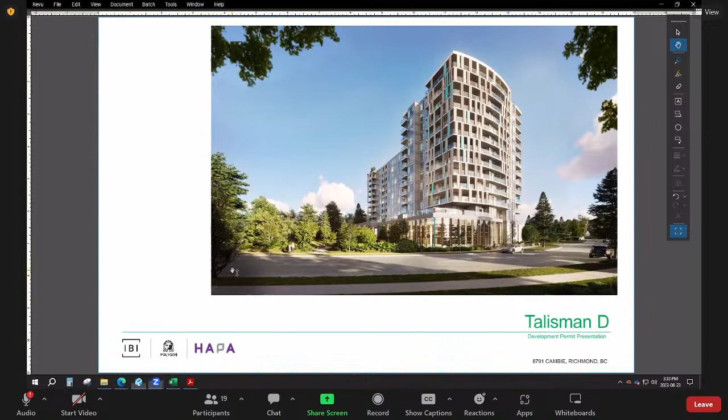Okay, thanks for hearing me today. Here to present Talisman, or Talisman D, the central site in this mixed-use community being planned for this location. Talisman A is to the south, the wood frame product, and there are future phases to the north as well, with a new road system being built around this site. So the site in question contains a singular building with a large amount of open space to the north, and surrounding streets on two sides, as well as a pedestrian route on the south.

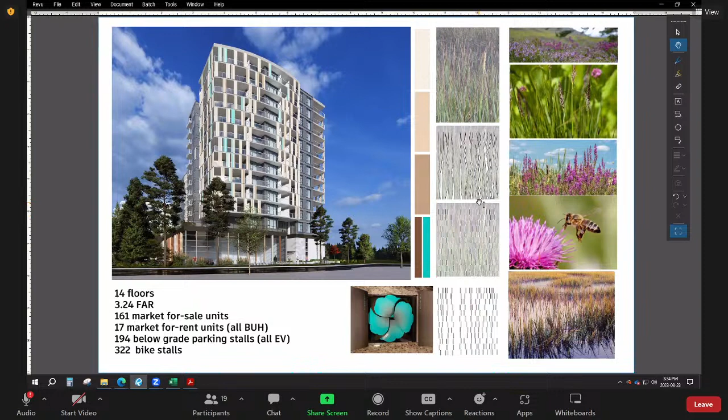Overall, as was mentioned, it's 14 stories, 161 market for sale units and 17 market for rent units, all BUH, with 194 below grade parking stalls, all EV, and 322 bike stalls. The genesis for the look of the building was inspiration taken from the grasslands and farmlands around the area, the meadows, and where the river meets the land.

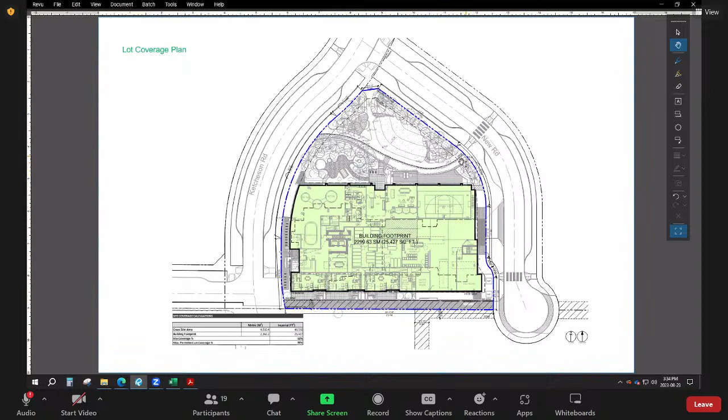The site context is basically an open field today for the most part, as well as the church property just to the south of us. The site is basically forming a box of program, with the remainder being open space, half of which is public park and half of which is private amenities.

The main pulse of height is on the west side, and on the east it's a little bit lower at 13 stories. As was mentioned, there's below grade parking for 2 levels, as well as a partial portion of bicycle parking as you first come down the ramp. On grade, the parking access comes from the new road, entering in and going into the basement with a direct path of travel. The loading functions and waste are all down on this bottom portion.

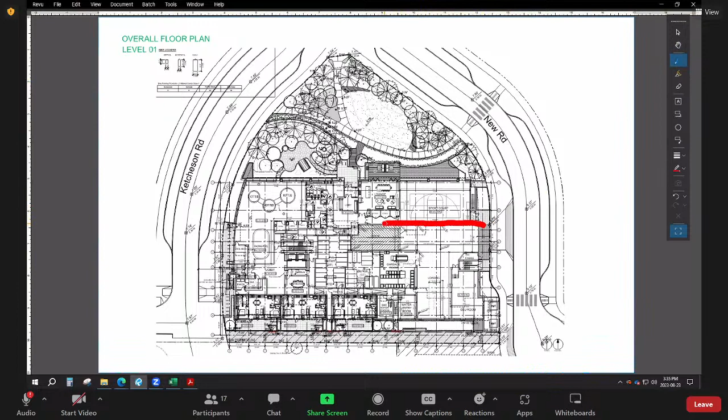The portion to the north includes a sports court and a lounge; the entrance for this large amenity zone is accessed by both the residents of the building as well as some of the surrounding buildings, which will be using this clubhouse as well. The clubhouse is on 2 levels: a ground floor, plus a floor above that has further programmed space.

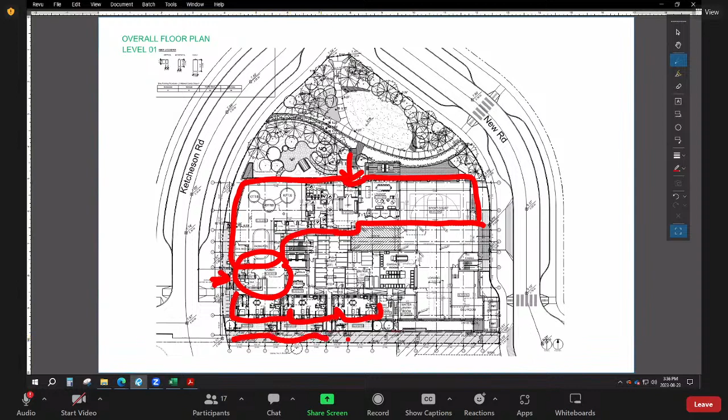The main lobby is off Ketcheson, and there are ground-oriented units facing the pedestrian space. There's also some bike storage for larger bikes on grade and smaller bikes upstairs. An open-to-below space in the corner gives you a double-height space for the swimming pool.

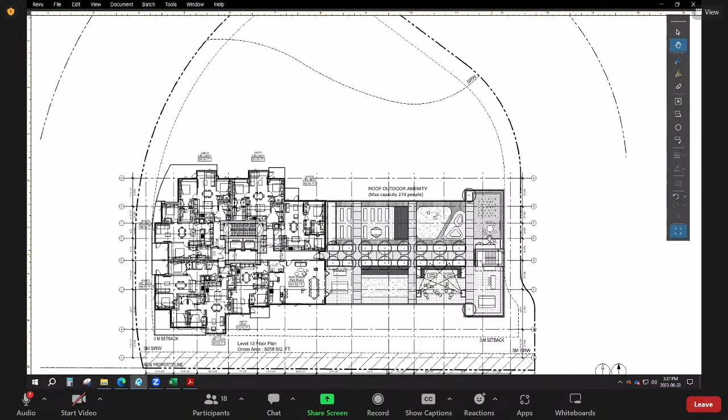As was mentioned, there's a full level of rental suites, which are also BUH units on the 4th floor. Typical units above carry on up till you get to the last floor, which has a large outdoor space for the building, for outdoor amenity, as well as an indoor amenity adjacent to that. One more floor of units followed by the rooftop.

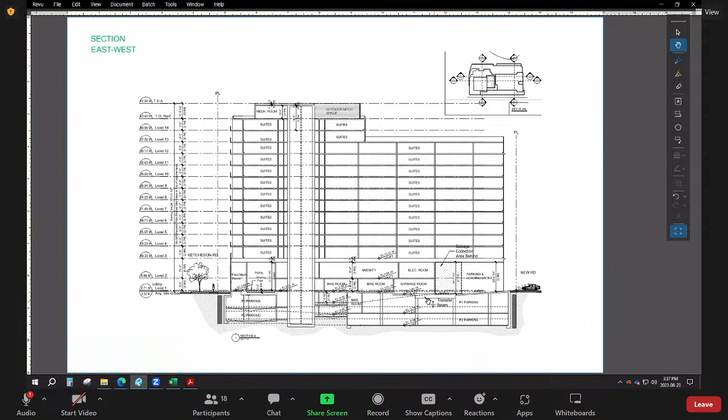Overall, the building hits the max heights permitted in the area, as well as the correct proper heights for any habitable spaces at grade based on the road elevations. As mentioned, the podium is a double-height pool, plus 2 stories of amenity and townhouse ground-oriented units, with regular units all the way up the rest of the building.

The screens present on the building give it an artful expression, which is important because this neighborhood needs to have artistic expression as part of the art neighborhood. It also recollects the grasses again in coloration and in the movement we're proposing along the balconies.

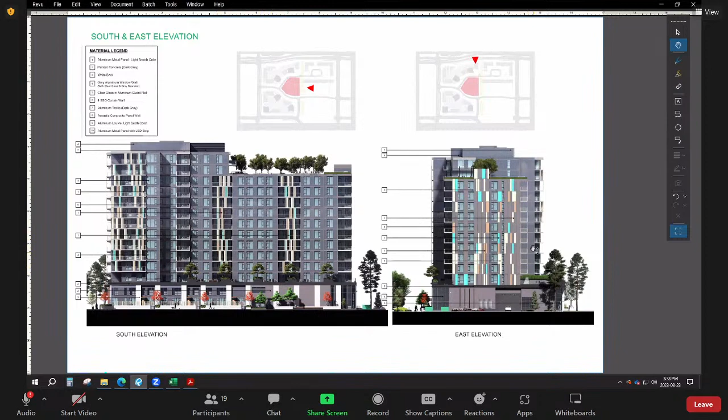That expression happens on the north, south, and west sides, as well as the east elevation, which has it on the window wall itself in colored panels.

The proposal includes a lighting scenario that'll have soft lighting on some of the vertical members in the feature corner only, to make it beautiful both during the day and at night.

Again, the landscape, which we'll get into, is very lush, looking at bringing in conifers and other plants that'll make it quite a lush, green experience at grade.

This is showing the south side with ground-oriented units and a decorative fence being used as a privacy screen or a rail between the units and the walking path, at guardrail height.

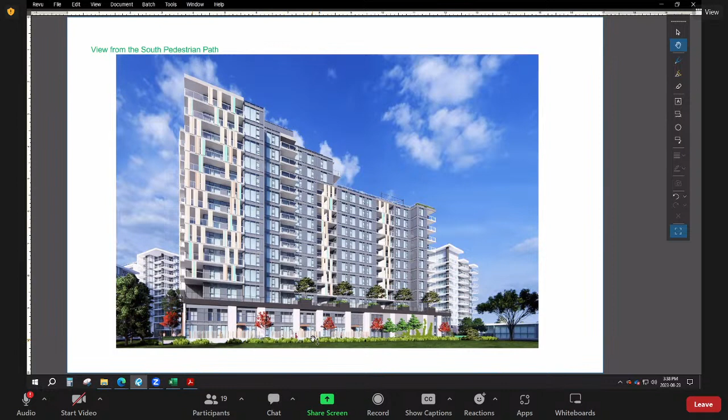There are opportunities for some planting and benching, as well as at the far corner, where we're showing a glazed box to express the DEU facility on the inside, so you can see some of the engineering.

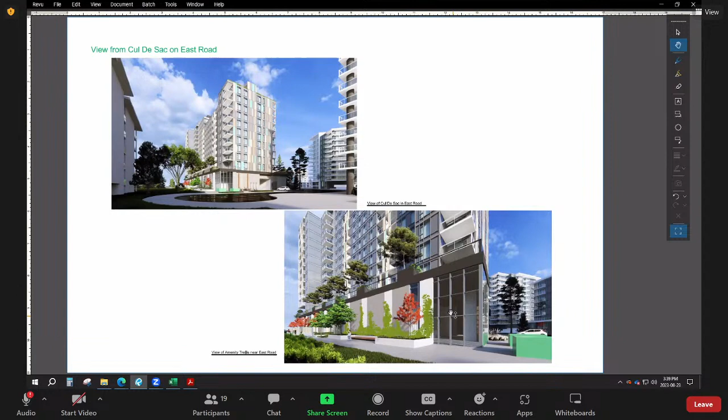The lobby, as well as the artful rail in the back, seen in these two images here, and then the night view.

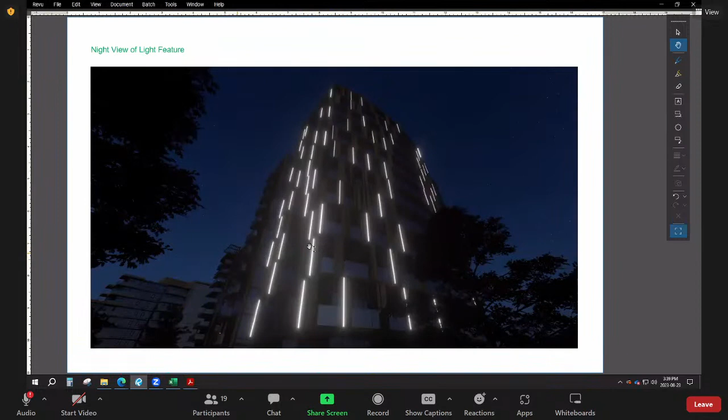I'll pass it on to landscape to speak to. Stephen, would you like to speak to the slides? You can tell me when, and I'll go to the next slides.

Sounds good, thanks Gwen. We always start off our landscape by giving a landscape rationale as to what inspired the design of the site.

One of the things here is we found a historic map of sloughs that used to run through the city of Richmond, and one of them actually intersects our site. We wanted to celebrate that a little bit and use it as a divider between the public and private realm, in the form of a rain garden.

Another principle is reinforcing the edge by using topography and planting, providing a bit of separation between the site and the street around it.

Acknowledging that this site is pretty central to the rest of the development, we wanted to make sure we address all the connection points and that it's accessible for everyone.

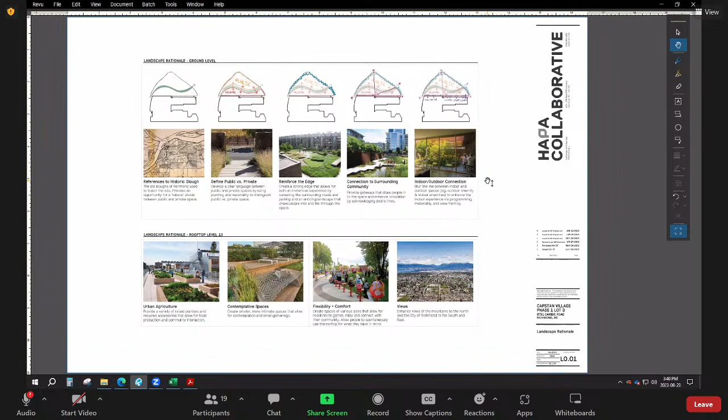We always take a look at the indoor and outdoor connection, and we've got strong glazing windows that face this private and public amenity space, making sure the outdoor spaces match what's being used in the indoor spaces.

Here you can see the ground level landscape. In the most northern area is the SRW. Along that edge, which Gwen is highlighting, that's the divider between the public and private amenity space, and we're using this rain garden as that strong divide.

Lush planting along the edges, a bit of topography, several large benches that could be used for informal seating or staging, and an open lawn area.

Crossing over the wooden bridge into the private amenity, we've got an outdoor spa area with hot tub, cold plunge, barrel sauna, and a fire pit. We've also got a barbecue area that connects to the indoor dining experience, as well as a bocce court.

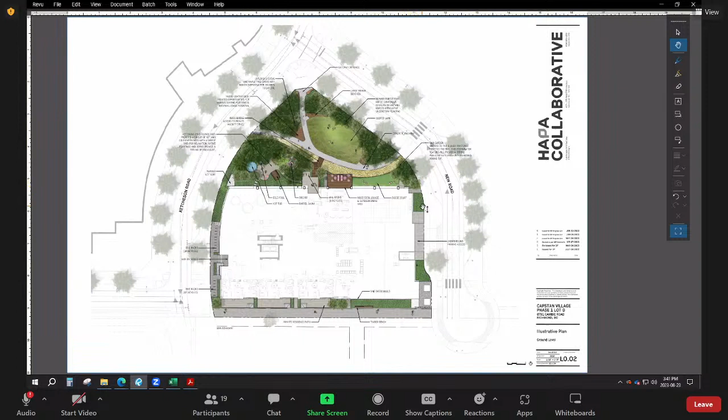It should be noted that this ground floor is accessible for all residents of the development, not just this building.

And then we've got the rooftop here. We've been inspired by the bento box idea, a very grid-like form. You walk out to this large corridor flanked by flowering apple trees that are fragrant and colorful, and on either side we've developed a series of rooms.

So we've got urban agriculture, children's play, outdoor dining, and relaxation areas.

And just a few sections showing, back on the ground level here, the berming that we talked about and some of those raised bench seating, and then the lawn area that would gently slope back down to the concrete walkway.

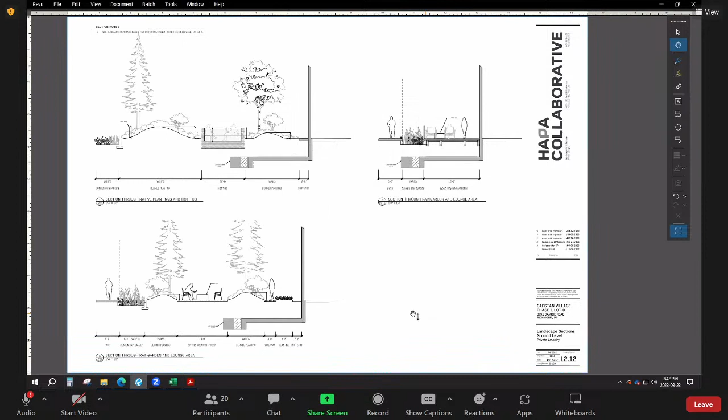A few more sections. This is now in the private amenity, showing berming, lush native plantings, and the rain garden. Back here is the SRW, pretty standard. We've got our ornamental fencing there and some gated access.

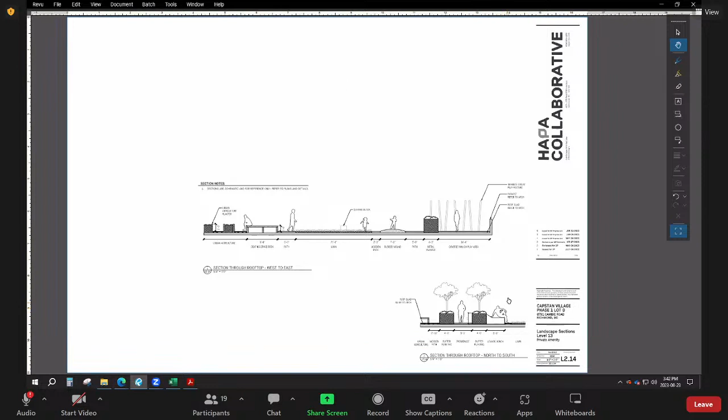And the rooftop here showing some of that children's play, urban ag, and a section through that corridor of flowering apple trees, and some of our children's play features, which we've tried to keep more informal but fun for all the kids to play around on. I think that's the end of the presentation.

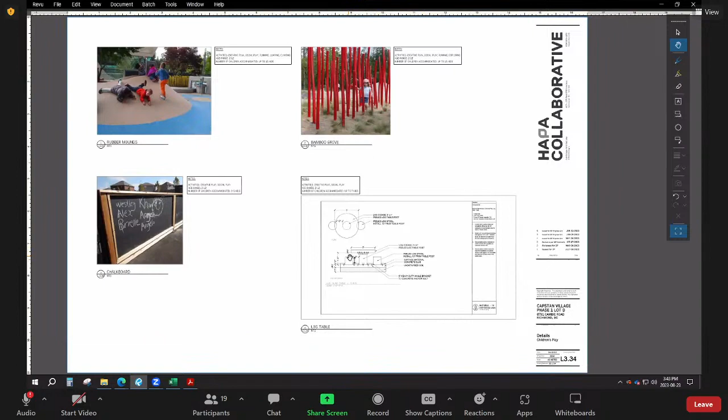Okay, great. Thank you. Let's see if John or Cecilia have any questions. Just a quick one on the amenity space — so level 13 is for private use only, and the rest is all shared with the other phases, correct? Correct.

Okay, and one question on the CPTED side of things — I imagine that lighting at grade will be present but not too glaring. Can you just quickly walk through that? Yeah, that's correct. The plan is to have lighting all throughout these walkways to make sure it's a well-lit space, but we've ensured all the lighting faces downwards for bird habitat and whatnot.

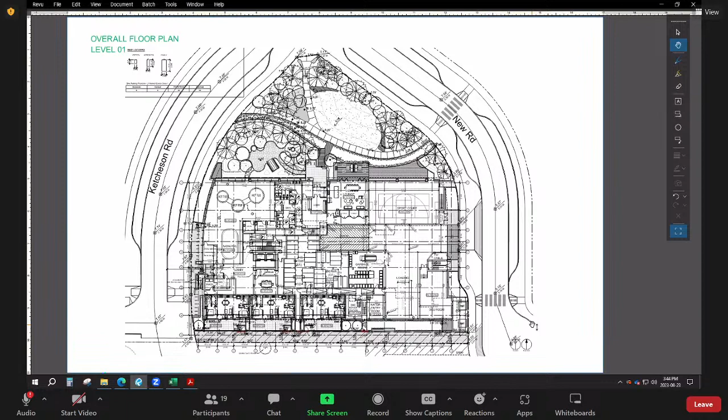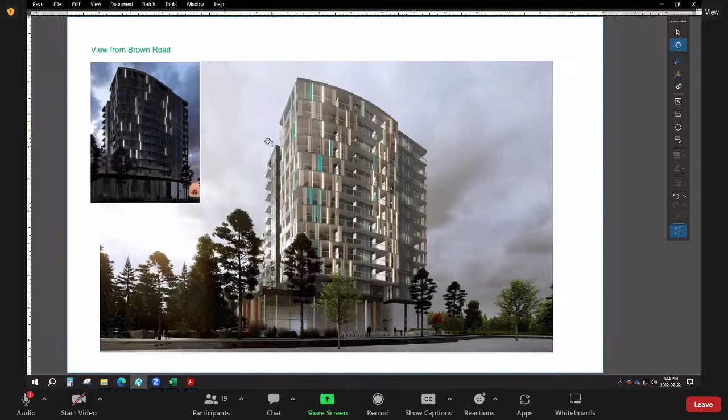While you're on the lighting question, can you speak to the building itself and the lighting you're proposing? Maybe Robin, do you want to speak to the lighting when it comes to time of day? Did you mention in your presentation that it's just a portion of the building? Correct, it's only on the west and partially on the north — just the portion you see in this picture, this leading corner.

So those light fixtures are located between panels within a screen. They'll have a C channel on the back side so there's no light shining directly back inside the home itself. We've been working with staff and our electrical engineer to make sure lighting levels won't disturb other residents of adjacent buildings. We're limiting the power output, controlling the time of day and intensity, and we have the ability to dim the fixture to 50% if necessary.

One of the development permit considerations is entering into an agreement and bonding for these light fixtures to ensure the city is satisfied that when operating, it is within parameters everyone can be happy with. So you have the ability to adjust it up and down, and if there are any unintended consequences, allow for that. That's right. Okay, great.

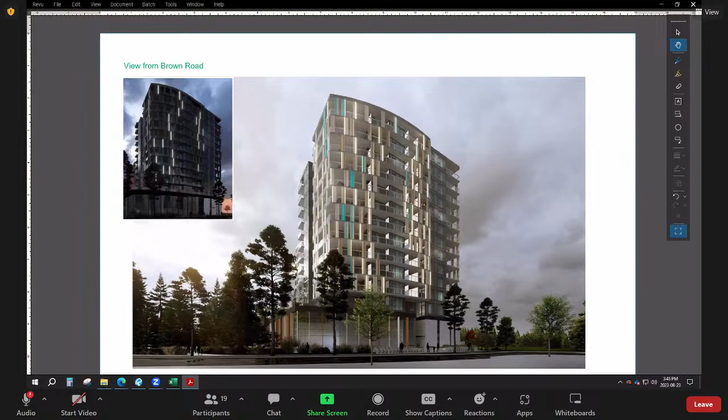John, did you have questions? Thanks, Mr. Chair, just one — if you could maybe speak to the adjacency to the south, I think that's the church site there, what's happening there? Sure, I can speak to that. We've been working closely with the Anglican Church, with the congregation there. We've got a good relationship with them. They have already entered into an underpinning and crane swing agreement with us for construction of this parcel.

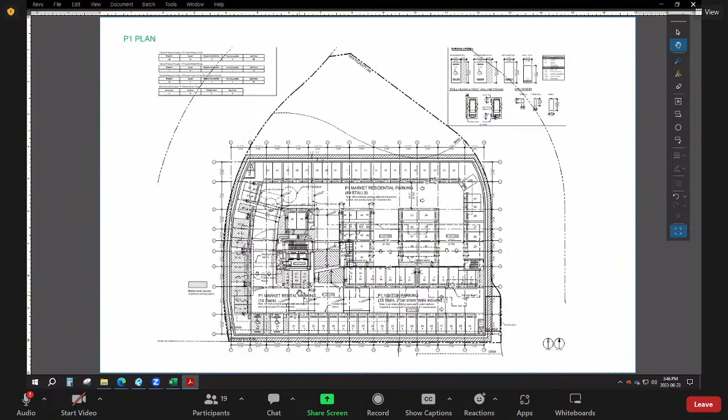Near the end of the slide deck there was one section through the site showing about a 3 or 4 foot step down to their parcel, so they're lower than our site, right there at the bottom. We're working with them to resolve that interface. We've discussed putting planting beds there for the daycare operated from the rear of their site, and talked about chalkboards, painting walls, things of that nature. We don't have a solution yet, but we're having the conversation about what that interface will look like, and we're happy to work with them to resolve it.

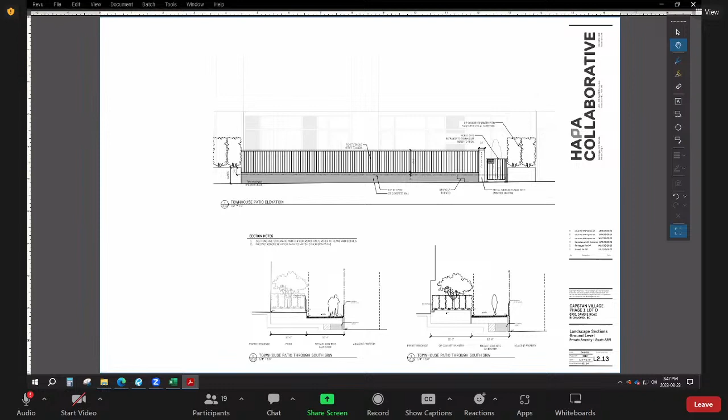Great, thanks. Okay, I had a question relating to the terrace level — there's some urban agriculture up there. My recollection, maybe this is for Robin or Wayne, is that through the rezoning, which had a few twists and turns, there were some commitments made around urban agriculture. Is what you're proposing delivering on the understanding reached through the rezoning?

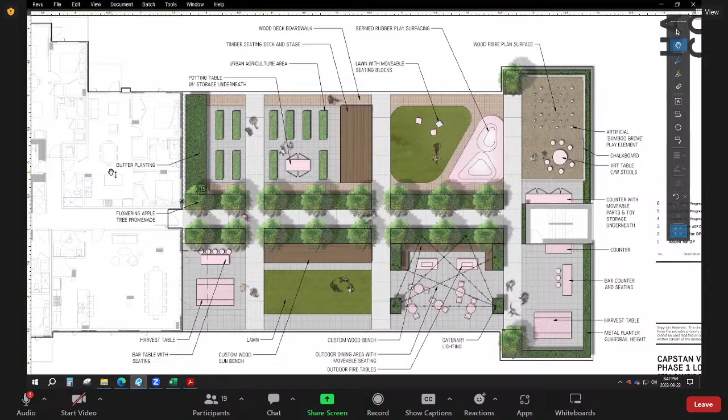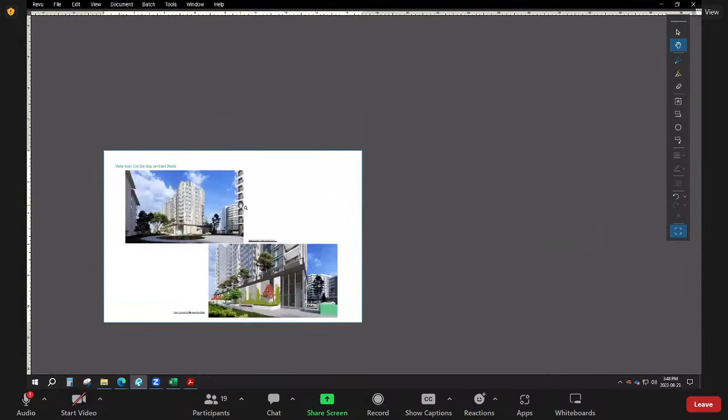Sure, I can take that one, Wayne. This urban ag on this roof is not part of the requirement discussed through the rezoning process. That rooftop urban agriculture is over on Site 1 in Phase 1, located on the roof of the first building, the 6-story wood frame affordable housing site. Oh, so it was on the one we've already looked at? Correct. So this is just intended as an amenity for the folks in this particular building? That's correct. Okay, good — I didn't have any other questions, so I think you're free and clear.

And Wayne, do you have comments on this project? Just a few comments, Mr. Chair. I concur with the applicant's commentary on urban agriculture. The requirement secured through the rezoning was fulfilled on the affordable housing building in Phase 1.

In terms of additional comments, I just want to clarify that the indoor and outdoor amenity space on this site is shared with the future phases 3 and 4. The rental site in Phase 1 provides all its own indoor and outdoor amenity space. There is no sharing with this site.

With respect to the development itself, there is also a comprehensive transportation demand management package. That package includes a number of special features being afforded to the market rental units, including bike and car share memberships and 2-zone transit passes for the tenants. The overall TDM package also includes the provision of 2 car share vehicles and 2 car share parking spaces within the parking structure. Those spaces will be available to all members of the public that are part of those car share providers' membership.

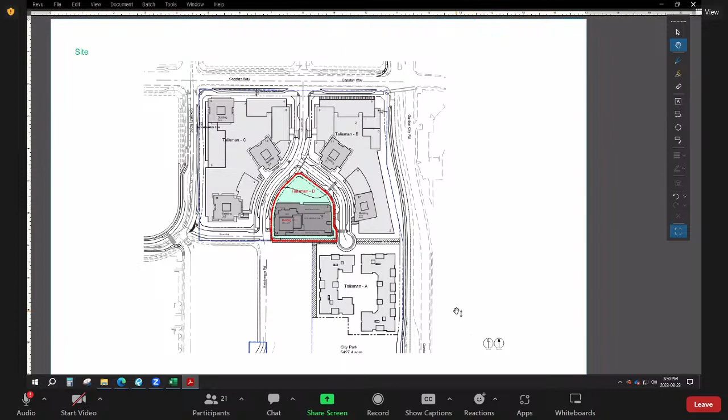I would just say, great looking project, and I'll just call out your exposed corner there for the DE infrastructure. I haven't seen that before on a project, so kudos to you for picking up on our corporate and community focus on clean energy. Great to see. Best of luck.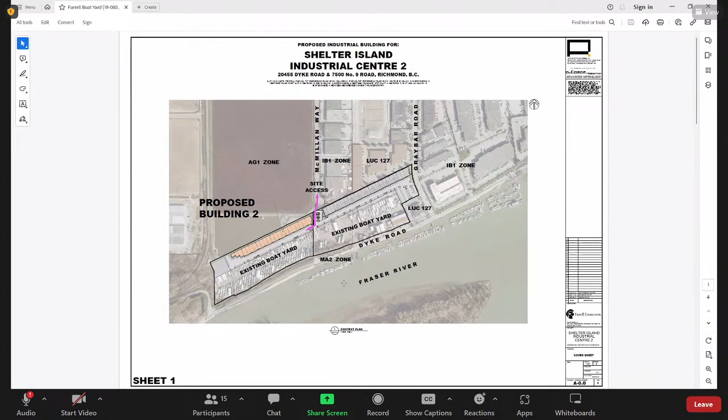The building we are discussing today is phase 2 of a multi-phase project. As you mentioned, Joe, phase 2 abuts ALR lands to the north, specifically Maybog Farms. This required us to submit an ALR DP application to address the urban-rural interface with adequate setbacks, screening, and landscaping. We spoke at length with the neighboring landowner and made changes to our landscaping buffer based on their requests. We subsequently presented to the Food Security and Agricultural Advisory Committee, who reviewed and supported our ALR DP application at its meeting on June 29th.

Our vision for the overall future development will consist of approximately 5 phases fronting the river with pedestrian connections to the existing Dyke Road and path. But with that said, we don't have any plans right now for those future phases, as we have a very viable and profitable marina business. We feel these 2 buildings or phases will be a great support to our existing marina and boatyard by accommodating various existing businesses that operate within the boatyard, as well as new businesses, which will help drive growth for the existing on-site businesses, as well as provide much needed warehouse space for the city of Richmond.

I'll present our design team, which consists of Rushier Dahl, the project architect, Darcy Forcier of D-Force Design working under Rushier, and Al Tanzer from Landspace, the landscaping architect. And I'll pass the presentation over now to Rushier to speak more about the site. Thank you, this is Rushier, architect, AIBC architecture panel, and this is a rather sensitive context for this project, owing to the fact that it is adjacent to the ALR zone, as presented earlier, that we are having to go through the DP process.

Phase 1, which was not adjacent to the ALR zone, was not subject to a DP process, and we worked with the city directly for the building permit.

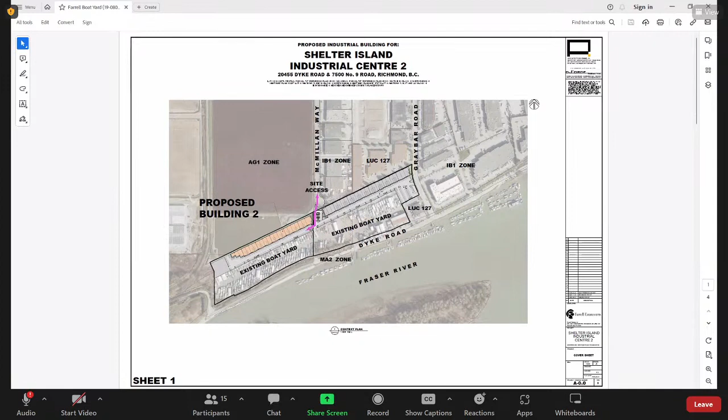This being a rather linear site, it has a linear built form as well. More importantly, there's a farmland protection buffer to the north, which Al will talk about. Access is from the cul-de-sac off of McMillan Way, and there's a right-of-way you see there. Everything was contingent upon working with those constraints and an existing boat storage to the south.

More importantly, the vehicle access is from McMillan, with allowance for future pedestrian access from McMillan to Dyke Road. That's the important part of the design. Towards the west side, the building is stepped back, respecting the right-of-way you see hatched out there. I'll let Darcy talk more about the intricacies of the layout.

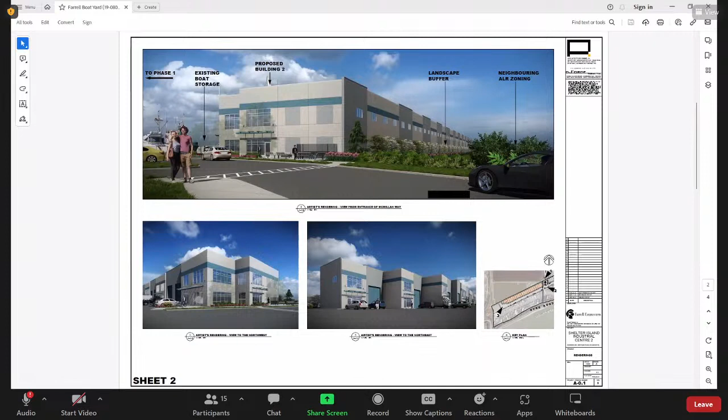Thank you, Rashir and Ross. This has been designed as a multi-tenant light industrial building for undetermined small users. It's 22 units, about 68,000 square feet. As Rashir pointed out, it's very linear owing to the site plan, being sandwiched between the ALR land to the north and the right-of-way to the south.

We've worked extensively with staff to satisfy all requirements of the zoning bylaw. No variances are requested. Primary access is off of McMillan Way through a driveway and then down along the south side, where you can see the vehicle parking and loading. Intermixed, we have garbage areas in conformance with city requirements, and also 3 amenity areas dispersed through the site.

We have 22 class 1 and 29 class 2 bicycle parking spots, so ample bike parking. Through consultation with planning, we've provided 12 EV parking spots. The whole building is in full compliance with the current BC Building Code for accessibility, entrances, parking, etc.

We've allowed for future access down to Dyke Road and the trail from McMillan through the site, at this time by way of a 3-meter right-of-way. As development of these two sites proceeds in future phases, the particulars of that right-of-way and path will be determined.

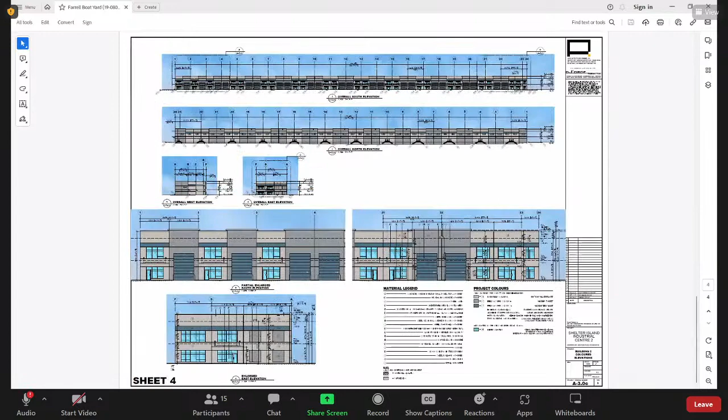Can you put up the drawing for the landscape? One second here, let me. The landscape drawing, I presume. Yeah, sorry, I didn't have that. I'll get that. Al, if there's anything you can do before that. Sorry, guys. It's all about that landscaping, folks. I know.

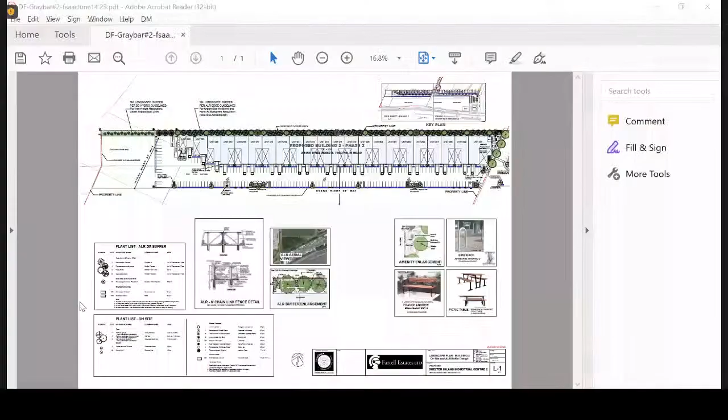If you're not able to get it up, we do have it in our package. So Darcy, I just flipped it over to you quickly in case you didn't have it. The version I have might be outdated — that's the only problem, I'm at a different computer, Ross. Unfortunately I won't be able to open that from my email. Stephen, are you able to place it up? I sent you that file earlier. Yep, just give me one second. Thank you, guys, I apologize for that. I could share an older version, but if you've got the most current one, that would be ideal. Sorry, Al, I botched your presentation. Well, he hasn't started yet. Even before he started, I botched it. Okay, here we go, that looks.

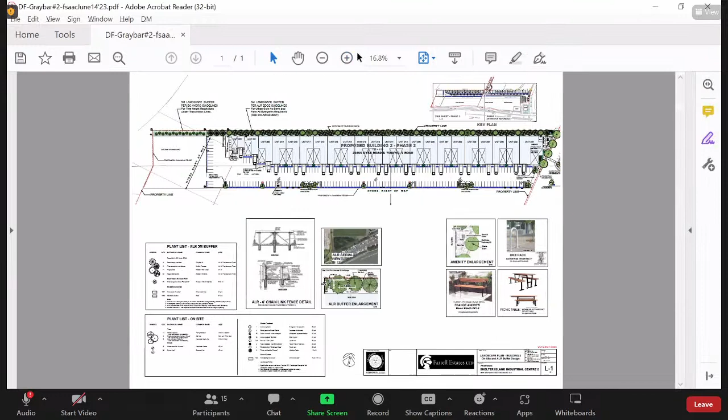Just wanted to mention first, my name's Al Tanzer, landscape architect, company is Landspace Design. Like most all projects, it's a collaborative effort when we work on the landscape. We're working with the owner to get the prerogatives and needs of the project. The architects and engineers on this project were critical, especially from a grading point of view, and working with the planner for various input on the different requirements we were able to meet.

With that being said, I'll mention in general that the site, as Darcy mentioned, has amenities to provide, and the critical components involved both the ALR buffer and also BC Hydro transmission lines coming through the site.

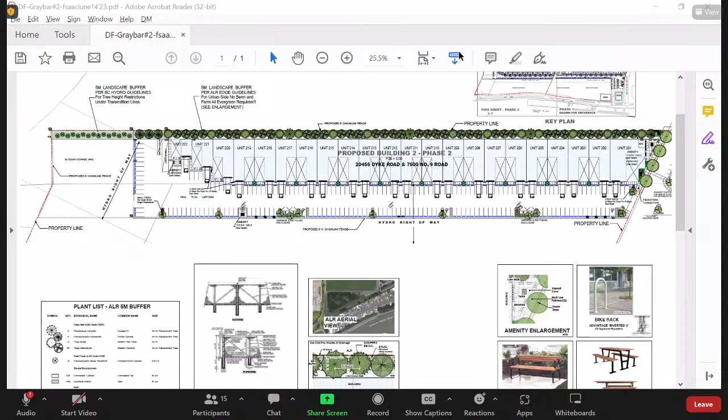Yeah, I have two questions. One, I think somebody did mention setback and the lighting, so because this is quite an isolated area, maybe a little more detail on the setback side. Secondly, on the grading along the path in the back where you abut the ALR zone - I'm assuming by you talking about not draining into the site, you are doing some sort of grading in the back so that the trees are at the same level. Are you building up and somehow managing that? Just those two points, please.

Engineering were brought in to help with the grading, and there'll be a swale before the fence line, with catch basins for any overflow, so there is no water that could spill over the property line.

On the CPTED requirements and mitigating factors, the site will be fully fenced. Given the boat storage to the south, it's already a reasonably secure area, so we'll have limited access. We're roughing in security cameras for individual tenants. Other CPTED principles followed include glass at entrances and windows looking down on entrance areas, incorporated throughout the project.